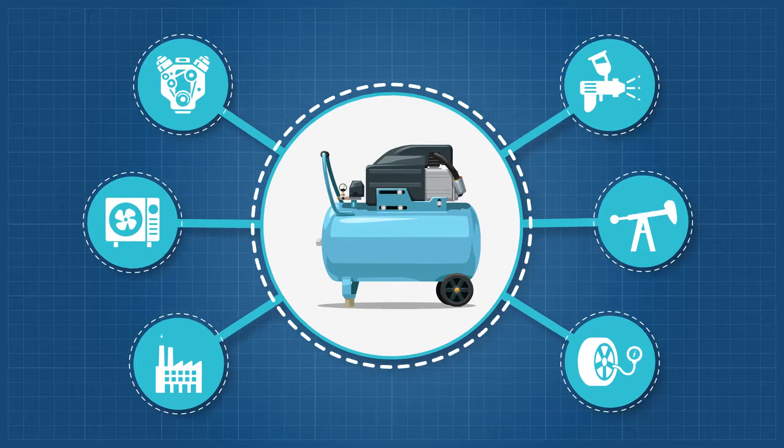Compressors are very versatile and they're ubiquitous tools in almost all workshops and factories and an important component in other devices. Let's check how they work and what different kinds of compressors are.

Compressors are powered by an engine or a motor and they work by forcing gas into a volume. The gas is then accumulated in a container to be used for different purposes like a workshop air compressor, or goes through other components in a circuit like a compressor part of a big equipment, like a gas turbine, airplane turbojet engine, or a house refrigerator.

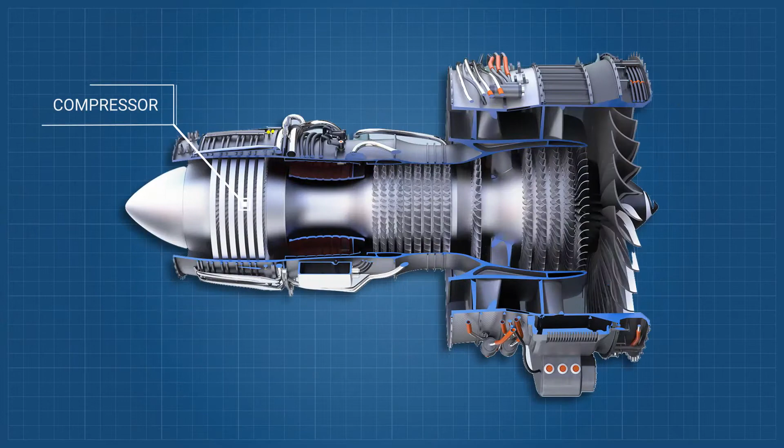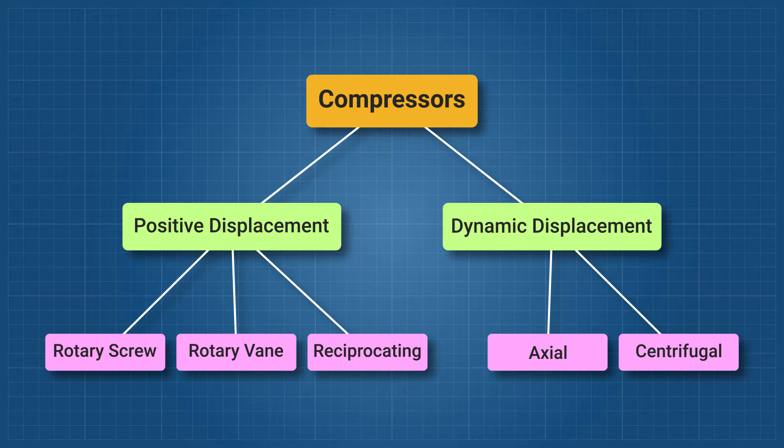There are two main categories of compressors: positive displacement and dynamic displacement, and each category has many subcategories. In positive displacement compressors, gas is forced in a chamber where the volume is decreased to compress the gas. Some of the positive displacement compressors are rotary screw compressors.

Rotary screw compressors have two internal screws that rotate constantly in opposite directions, and the gas is trapped and compressed between the two screws. This kind of compressor is very common and is great for continuous use.

Rotary vane compressors. Rotary vane compressors are like rotary screw compressors, but instead of screws, vanes are mounted on a rotor and rotated inside the cavity. The gas is compressed between the vane and its casing and then pushed out from an exhaust port.

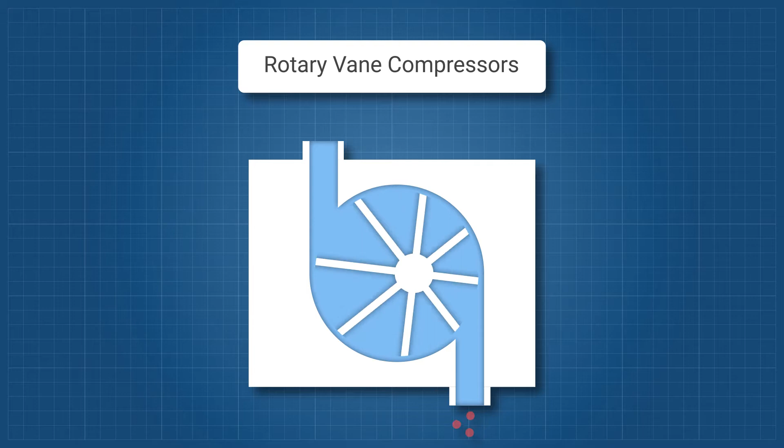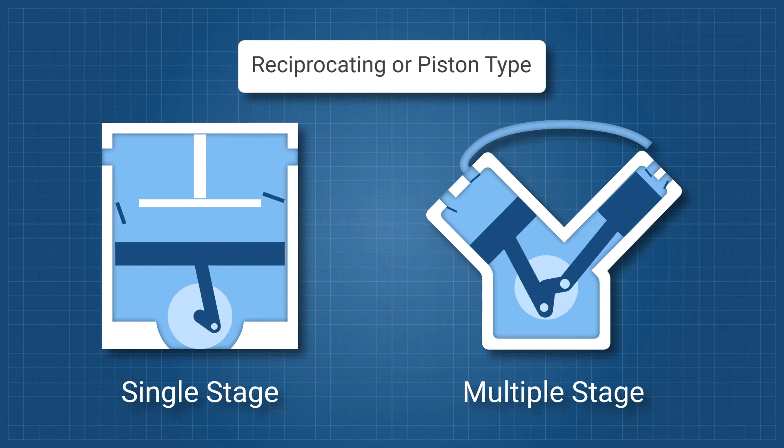Reciprocating or piston type. A reciprocating compressor uses pistons controlled by a crankshaft to compress the gas and is generally capable of producing high pressure, and it can be single or multiple stage. Multiple stage compressors have multiple compression chambers to reach higher pressures, and typically the gas is water-cooled by a continuous stream of water through the engine between different stages.

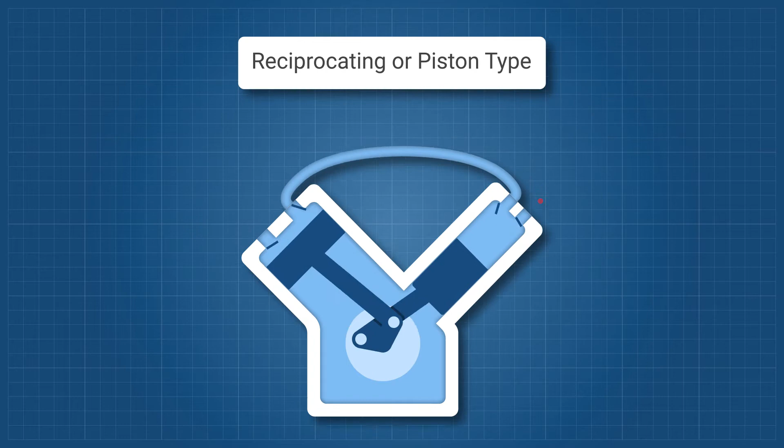In dynamic displacement compressors, a rotating blade powered by an engine is used to generate the gas flow. These are mainly designed for large projects, and they can be categorized into two subcategories: axial and centrifugal compressors.

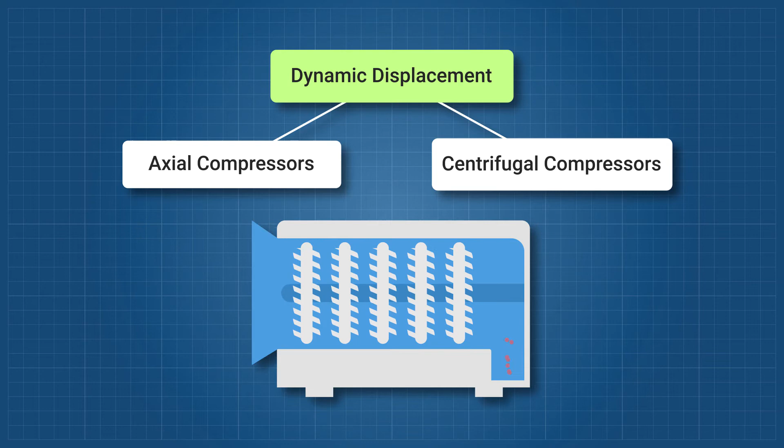Axial compressors. Axial compressors use a series of blades to force gas through and compress it. It uses multiple blade rows to increase the pressure. Axial compressors operate with stationary blades, which slow gas flow, change its direction, and increase the pressure. Advantages of the axial compressor are its higher flow rate and greater pressure ratio.

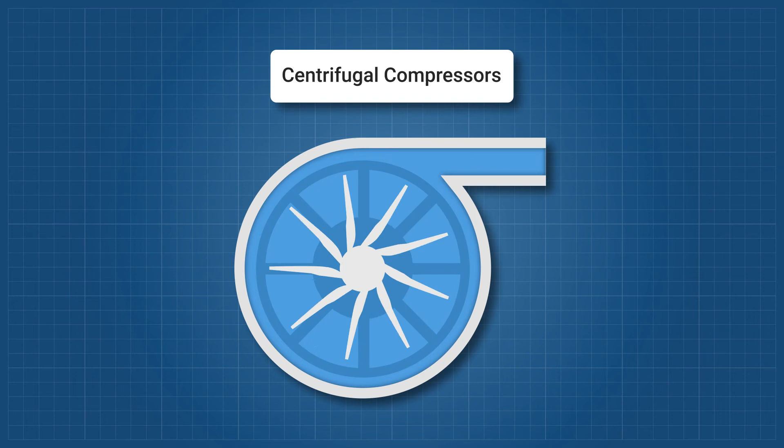Centrifugal compressors. Centrifugal or radial compressors work by bringing gas into the center through a rotating impeller, which is then pushed outward through centrifugal force. Then they usually use a diffuser to slow the gas flow and increase the pressure.

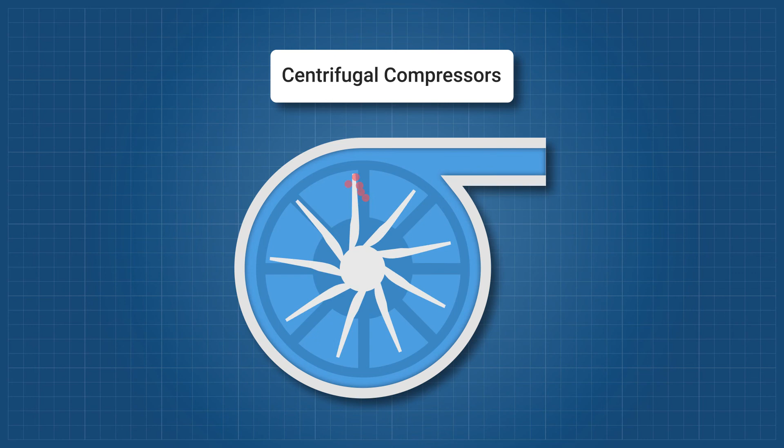Electric high-speed motors are typically used for these kinds of compressors. One of the more common uses of centrifugal compressors is in car turbochargers.